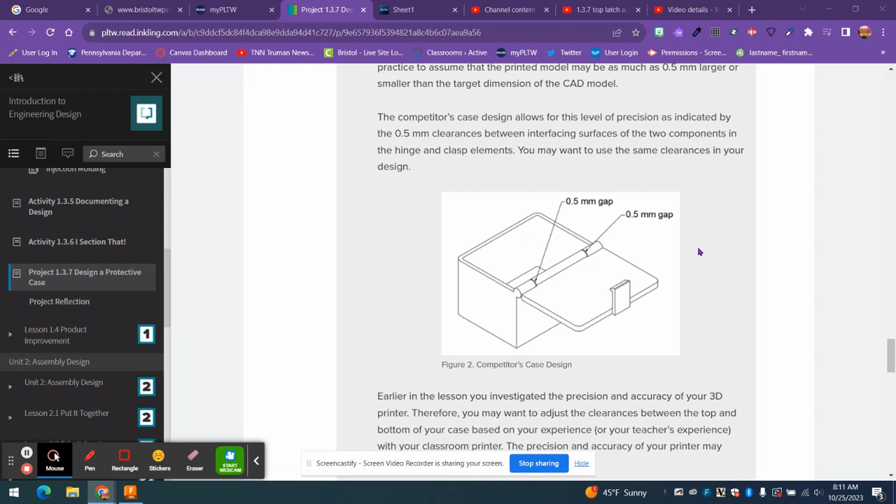All right everybody, we are going to assemble the pieces. So the biggest thing here is to remember that 0.5 millimeter gap, which has already been put into the measurements. And then we're going to go ahead and show you how to put it all together.

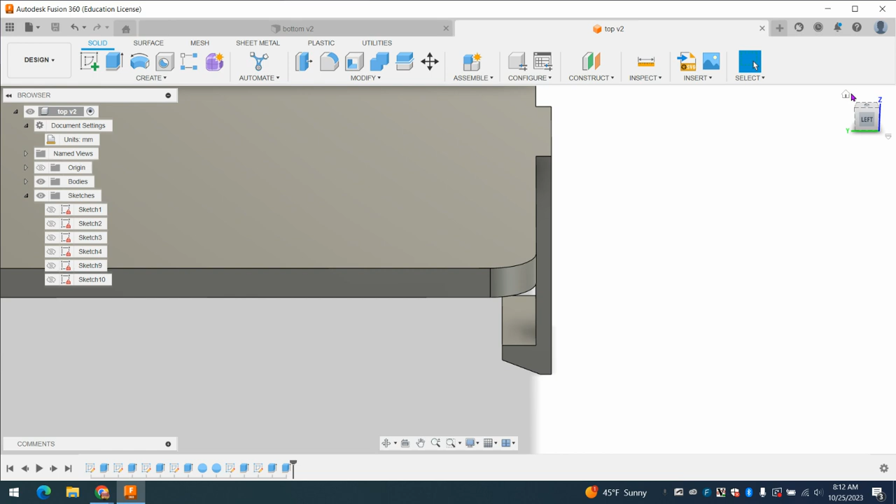So here we go. Right now I have a bottom and a top. So if I go over to my waffle, I just happen to have these in a folder so that it makes it easier for me. So when you go to your waffle, you have the two existing pieces and you're going to need that. You can do it other ways, but I like this way.

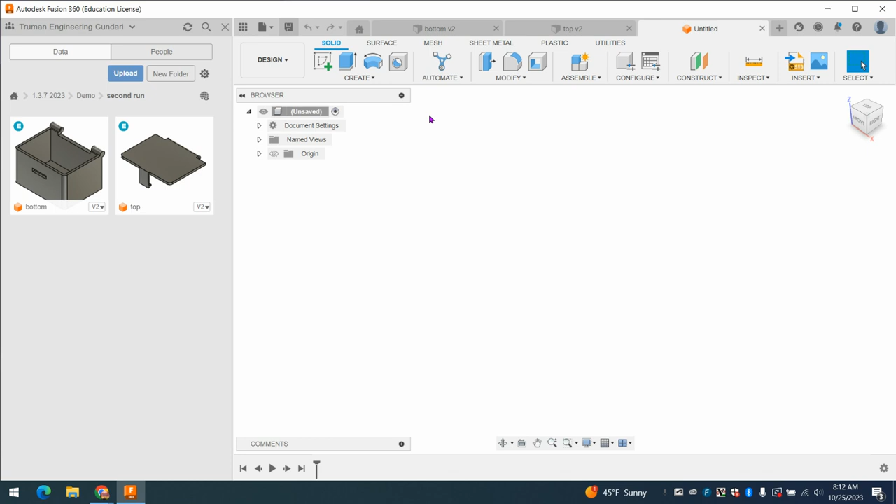Go to the plus sign here. And then the biggest thing is that you have to save it. So go here to save, and we'll call this 1.3.7 assembly.

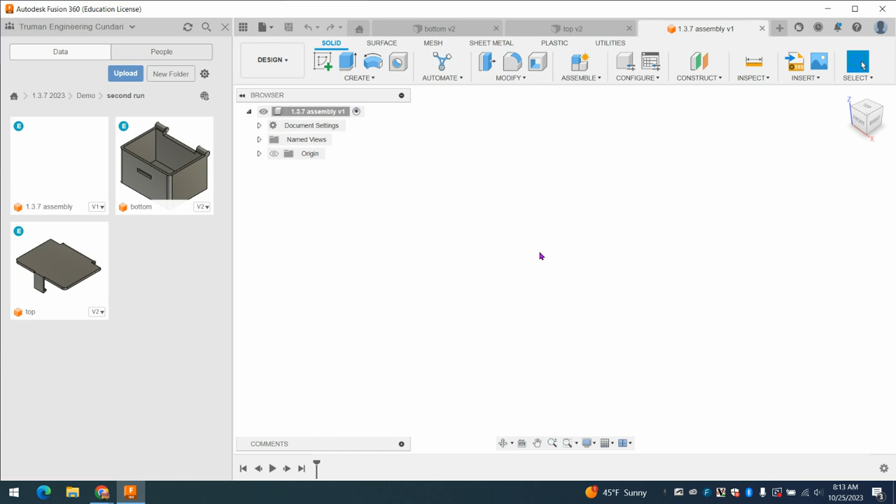So we're going to go ahead and take this bottom and pull it over - just physically pull it over. Click and pull, left button, hold down, and it brings it in. Now we're not so worried about orientation with this because it's the first one, so I'm going to hit OK.

The one thing I'm going to do is, because now you're going to have everything on your left, I'm going to right click on this and go to ground. So what I've done is I've said this is the first part, I'm sticking it to the ground. It can't move. So then as we do everything else, this is the one that doesn't change.

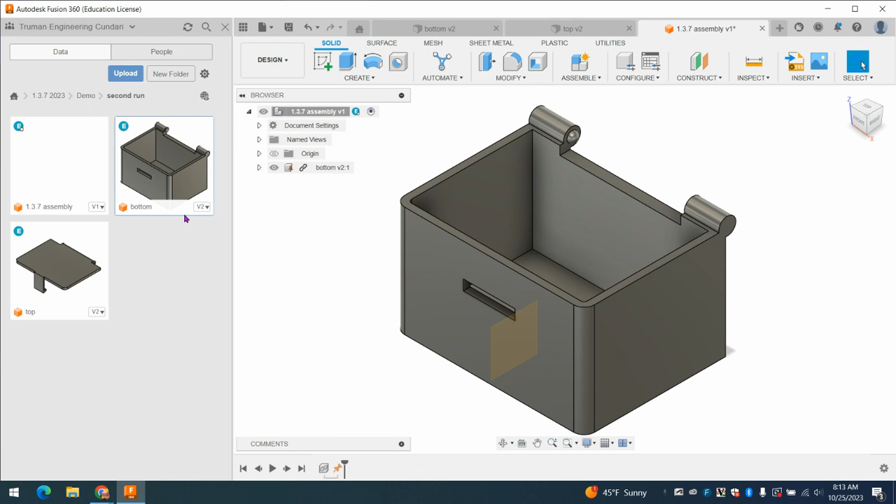And then we're going to go ahead and drag the cover in here as well, and it just kind of puts it wherever. This center dot, this is called your triad manipulator, right? So your center dot, you're just going to kind of move over here. I'm going to X this now so I have more room, and you can kind of move it above just so that you visually can see what you're doing.

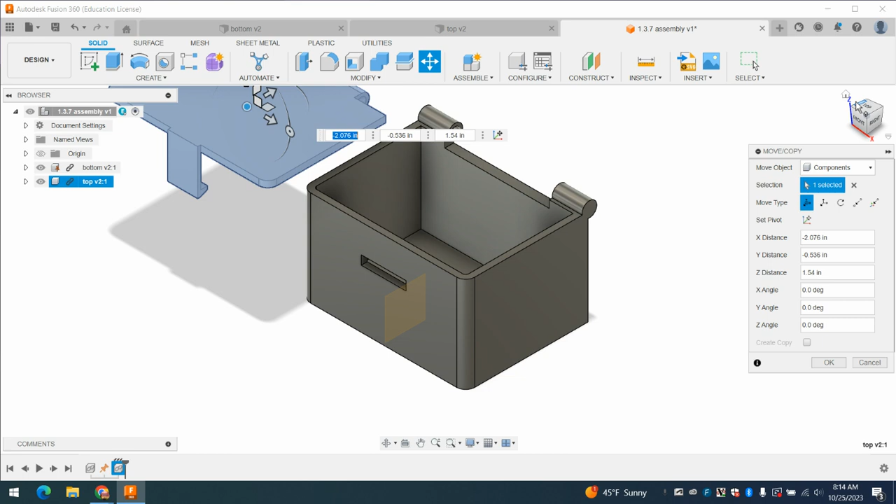This is where my rotational skills are terrible come into play. So we're going to go ahead and say okay, with it kind of floating like that so that we can see this, and we can see we're going to have to rotate it to see the other part. We're going to go to assemble, joint.

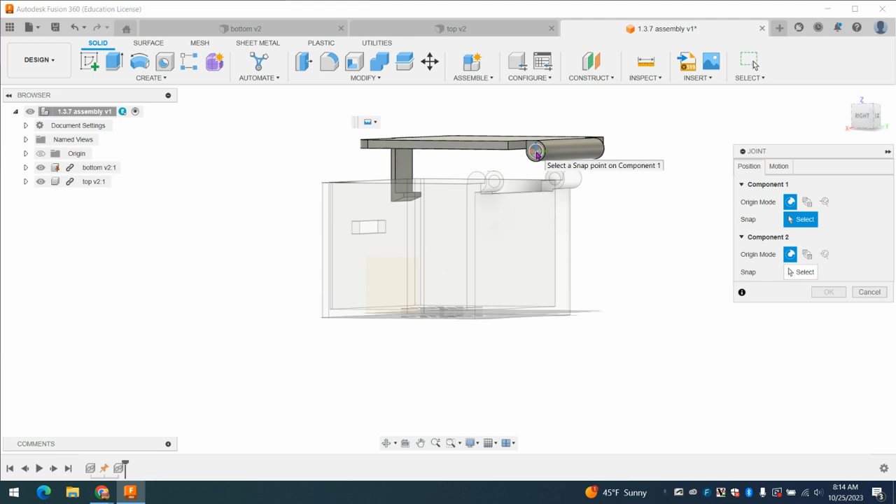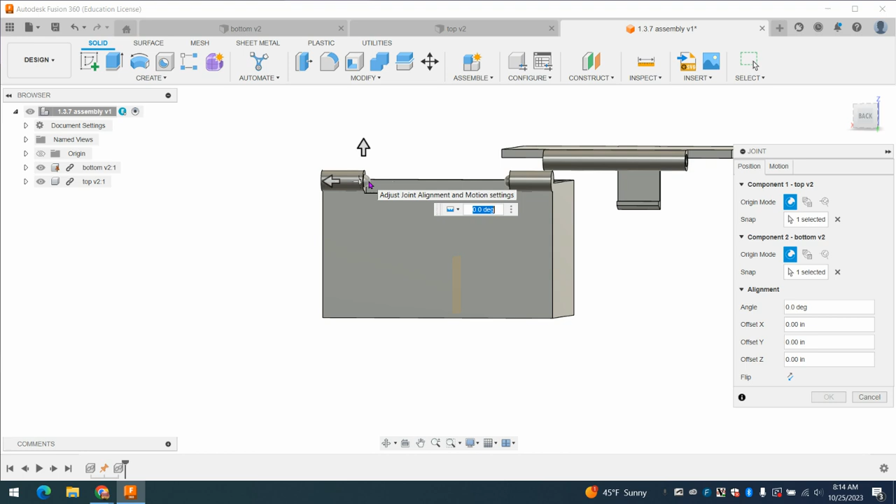We're going to select this one first and see how your blue, red, and green - there's like the little axes in there - they matter. So if for some reason you find yours is popping upside down or something like that, it's because when you go to pull this blue, red, and green, they're not lined up - see how my red would be, I want my blue to match my blue and my red to match my red. So that's pretty good, then it locks into place.

Now the other thing we see is that it locked it flat because we did it flat against flat, but we have that space there. So the space ends up being - I wrote it down somewhere. Where did I write it? Oh, 0.02. So we're going to put in 0.02 here, and it may have to be a negative.

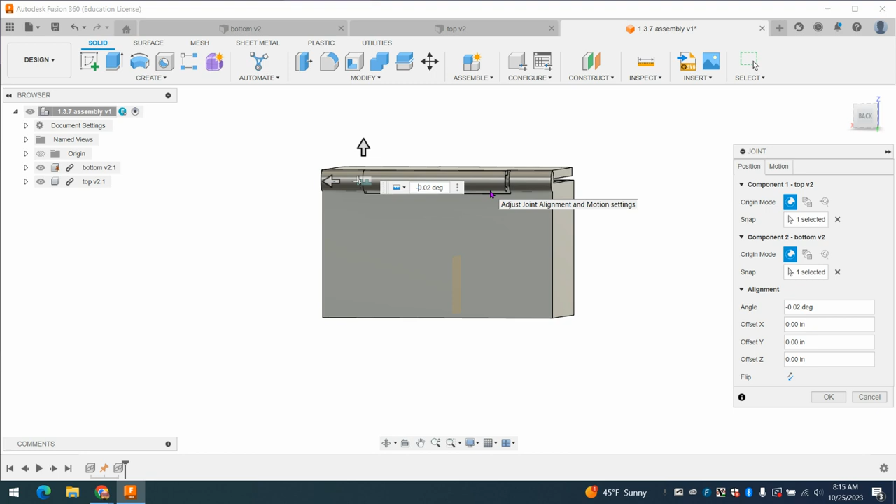Does that seem to be doing anything? No, I don't know what that's doing. Oh, that's degrees - yeah, that's not what I wanted. Okay, so let's not worry about that. So over here is what I want. It's like, why did you do that to me? Can I undo? Oh, you know what, let me just undo - oh, I went all the way. Sorry guys.

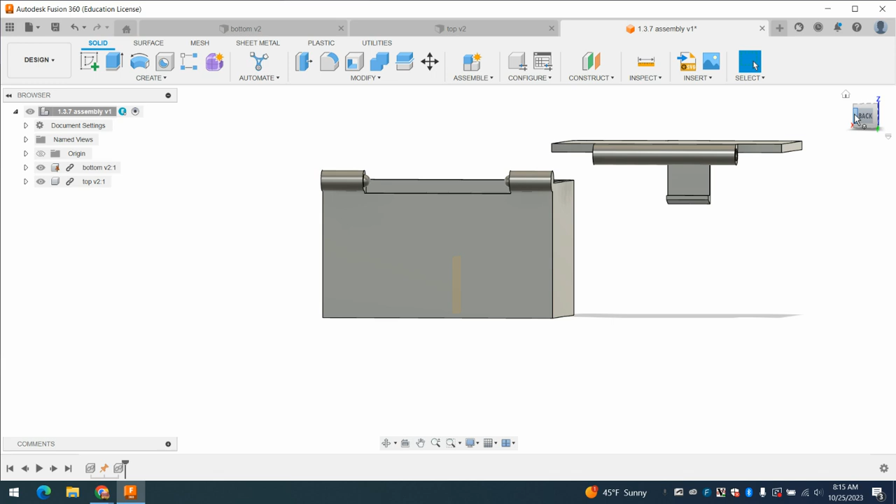Okay, we'll just do it again. So let's try that again. Assemble, joint, click on that thing. Pay attention to your red and blue - the green actually, I think, goes in different directions. But the red and blue - oh see, I did it wrong. Told you, it matters. So your red and blue matter.

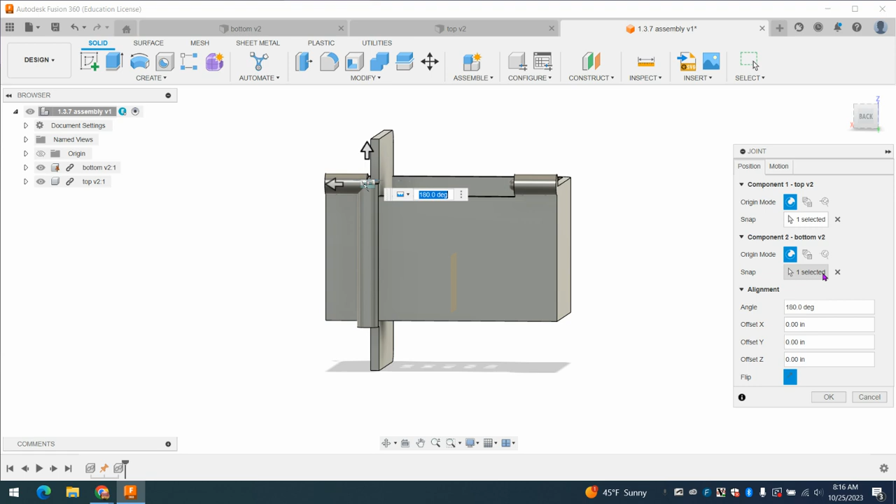No, why? Red's up, blue's to the right. Oh yeah, see that's not right. Okay, here we go - red's up, blue's to the right. Oh my God, it's upside down. It says 180 degrees - what if I make it 0? Then it's going the wrong way. Huh, well that's an interesting thought.

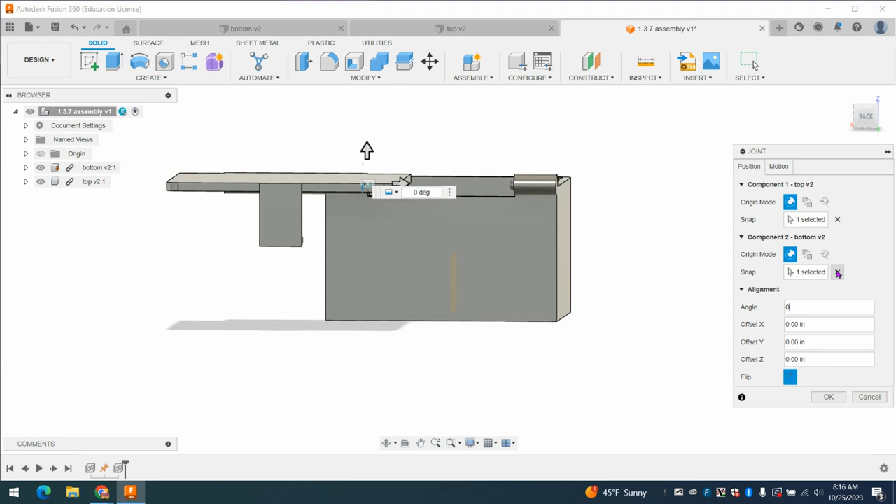I could change that, but let's try again. So I want the blue - that's what I want, the blue going opposite of the blue, and the red going up. So let's try that. There we go.

That was so crazy. And then what I want to do is take this arrow and grab it and move it. And why I'm doing that is because then I can see that's my Z axis. Sometimes, depending on how you build things, you go to move something and you're like, oh that's the X axis, but then you built it upside down or something happened - so if you move the arrow, you can always double check and make sure that you know what you're doing.

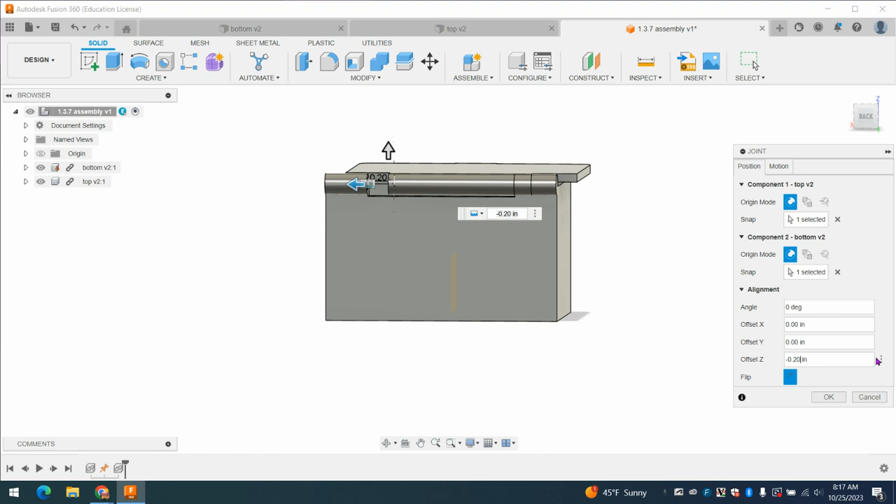And that's going to be, what did we say? -0.20. So that just throws it right in the middle. So if I click on back, see how it's exact on both sides, hit okay.

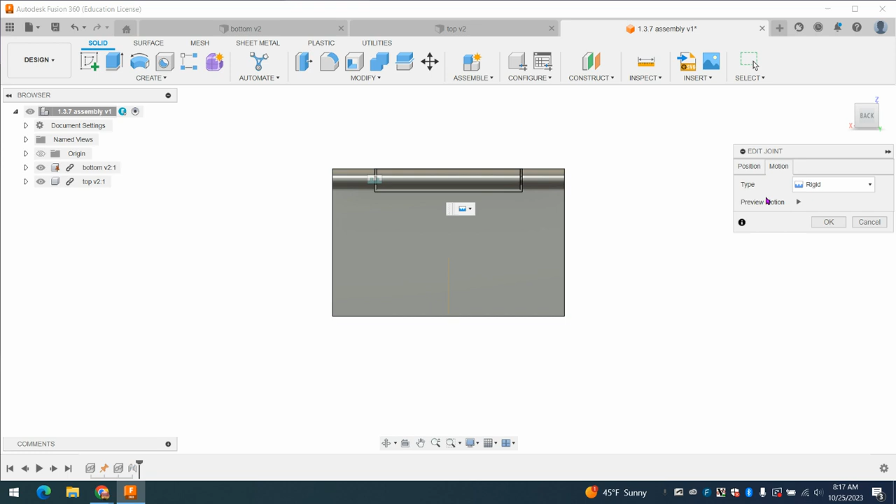And that looks good. The one problem I did with this, I'm just looking now, is that this is the wrong symbol. So I'm going to double click on my joint, and where it says motion, instead of rigid, I'm going to make it revolute.

And now there are ways to create a minimum and a maximum. I'm curious if it did. It snapped into the right place. Oh, that's kind of exciting.

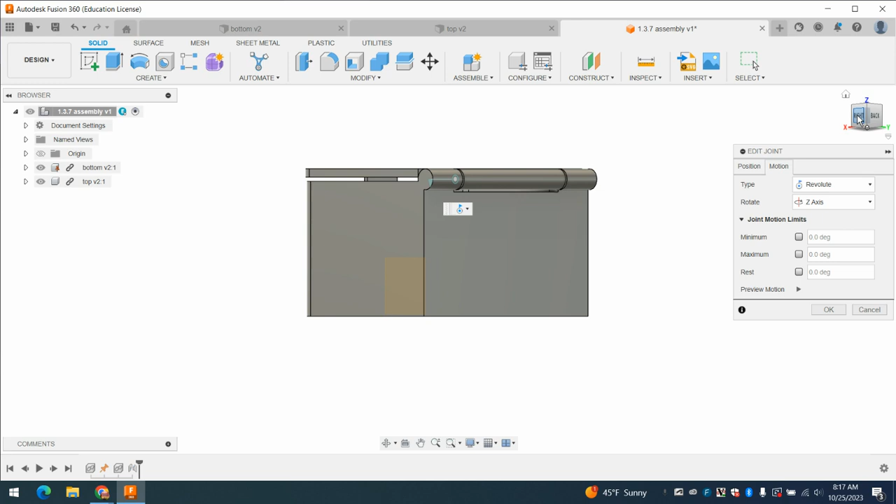The gap here, I don't like though. Just saying, if we're gonna go back and do this again someday, go sort that out. But we can actually change the minimum so that it can only go to here, and then your maximum would be this one. So it shows you it's like blue, right?

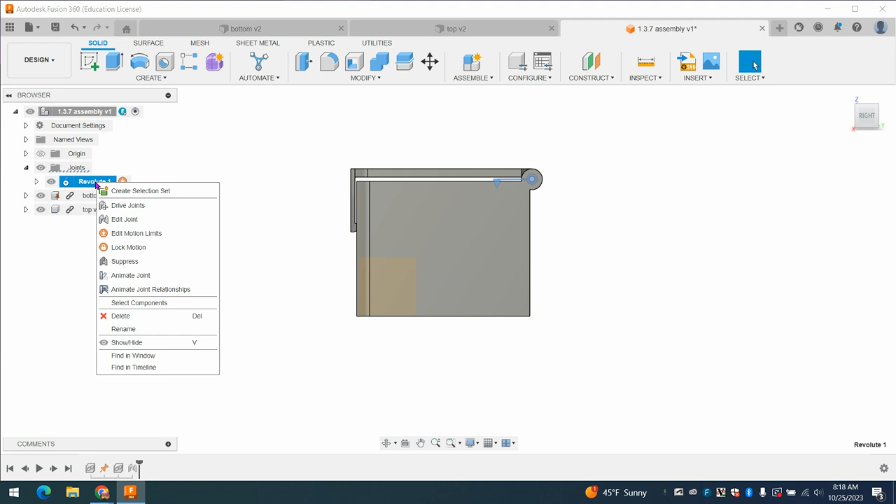So our max, let's make it go up here. Hit OK. Oh, double click on that again. Actually, I'll do it here in joints. So here I'm going to right click and hit animate, and it should just go up and down. There you go.

All right, guys, so if you've done all of this, you've officially assembled it. I'm going to hit save. I could do that all day. And hit OK so that it saved it.

But I want to show you that you can change things once something is assembled and it'll change it here. So let's show you how to do that. I'm going to go to bottom, go to modify, and go to appearance, because I'm not looking to change materials or anything right now.

Let's go to something cool. Let's do paint. Ooh, what is metal flake? All right, let's try this green metal flake here and see what we think of it. Oh, it's a download. I can download it, but I'm not going to do that right now.

That's like more - oh, they're all downloads. Look at that. Do I have anything that's actually here? Ay, caramba. All right, well, it's, you know what it is? It's because I'm using a different computer.

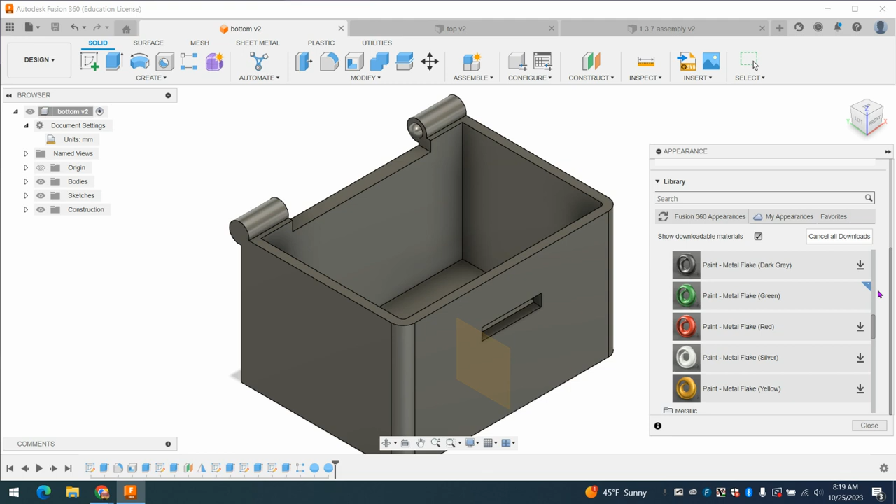All right, so we'll do the green metal flake. We'll download it. All right, let's throw this in here. Now, the one thing with this is I don't quite like the green.

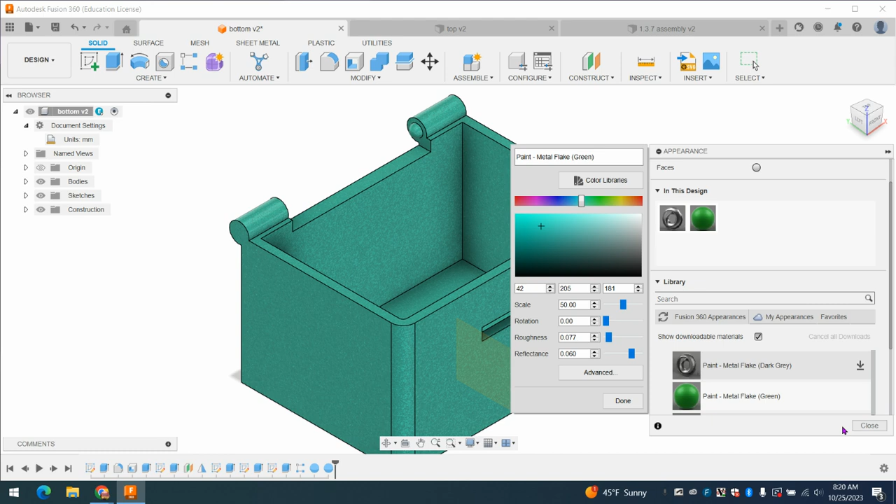So let's go back up here, double click on this, and look, you have your full range of everything. So I just wanted to show you that. So we'll go with this. Hit close. You can pick whatever color you want here, guys. This is, you know, do your thing.

So now that we have the color, we're going to go ahead and hit save. Hitting save is important, that's what throws it over to the assembly. So we're going to go here to the assembly, and I'm just going to see this exclamation point up here. Hit that, and it changes the color.

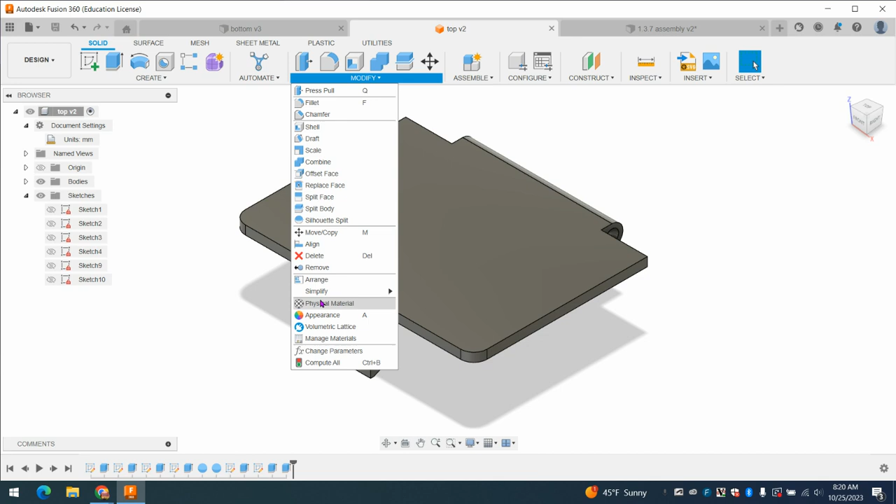So again, let's do that for the top. I'm thinking maybe something different that contrasts it, like maybe a shiny black, 3D printer.

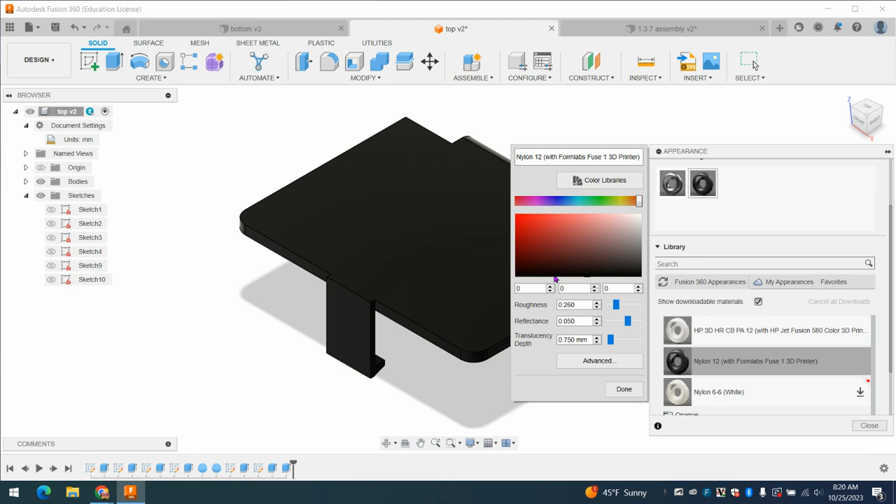I don't know, I just feel like the black against that blue color would kind of look cool. I would like it to be more glossy than that, I gotta tell you. Let's see what we got here. Let's go into paint. Dark gray. Ooh, dark gray would be pretty.

Did it do it? Yeah, I think that looks good. Okay, so then we're going to go ahead and hit save again. We're going to go here. We're going to hit this exclamation point.

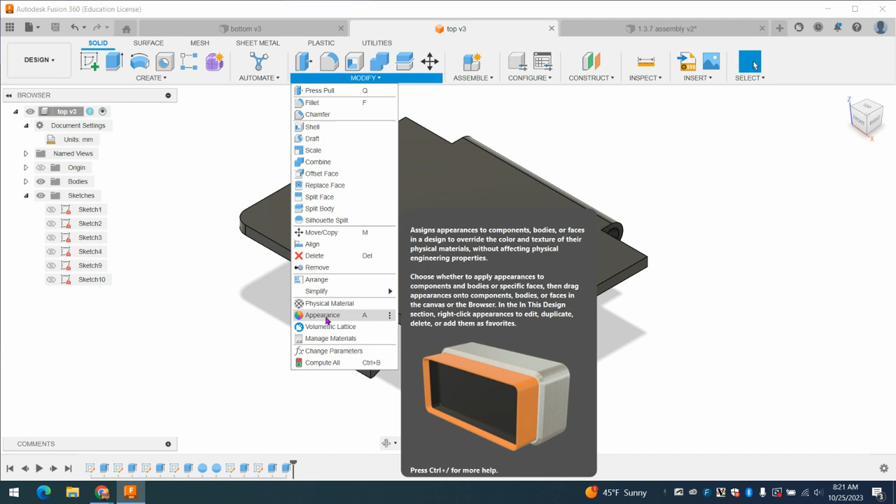Meh, I feel like it didn't change it that much. Now I'm just being crazy. You don't have to go nuts, but at this point you know what you're doing, you're just changing your colors.

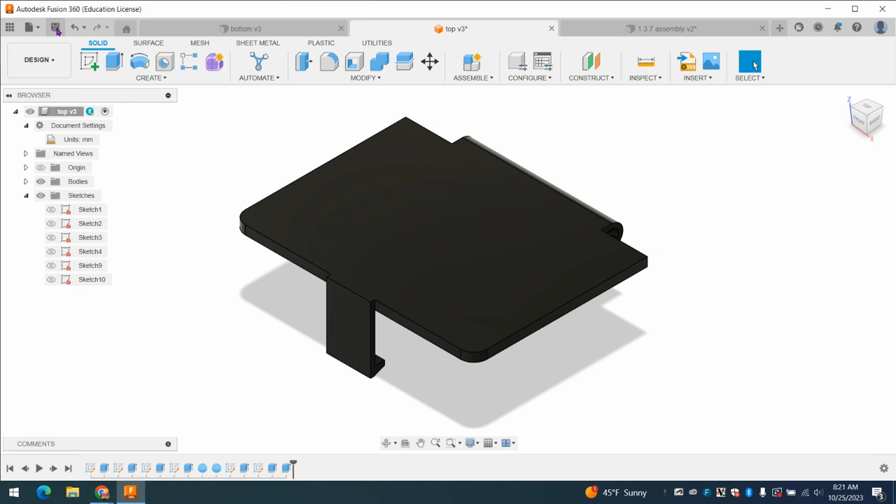Ooh, let's do like a metallic. It's not pulling - usually you're going to see a big difference in sheen, which is what I want to see. But I'm not seeing it for whatever reason, it must be my settings on my computer. All right, we'll call it a day.

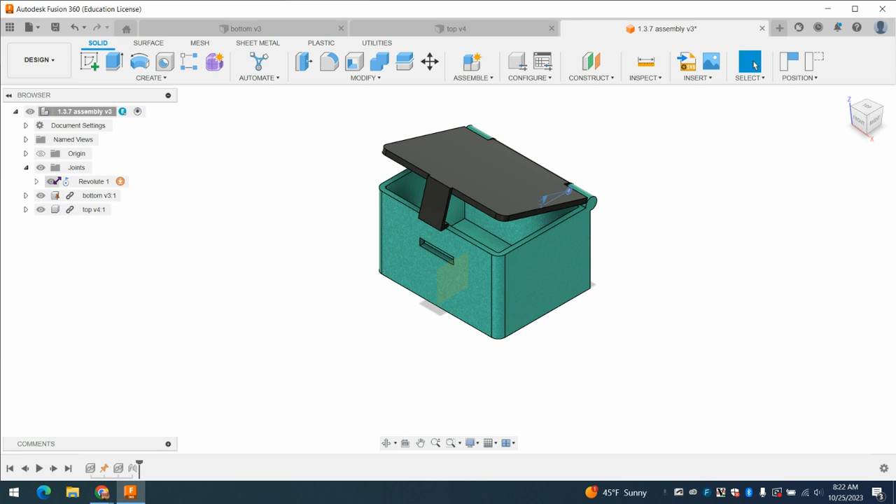Okay, so once you are done, you're going to hit save on this, and this is what you're actually turning into me as your assembly. So when I look at this, I should be able to open the lid, see how it opens up and closes. The bottom shouldn't rotate because you should have the bottom grounded. The one thing I'm going to do is just turn the eyeball off on this because it looks ugly.

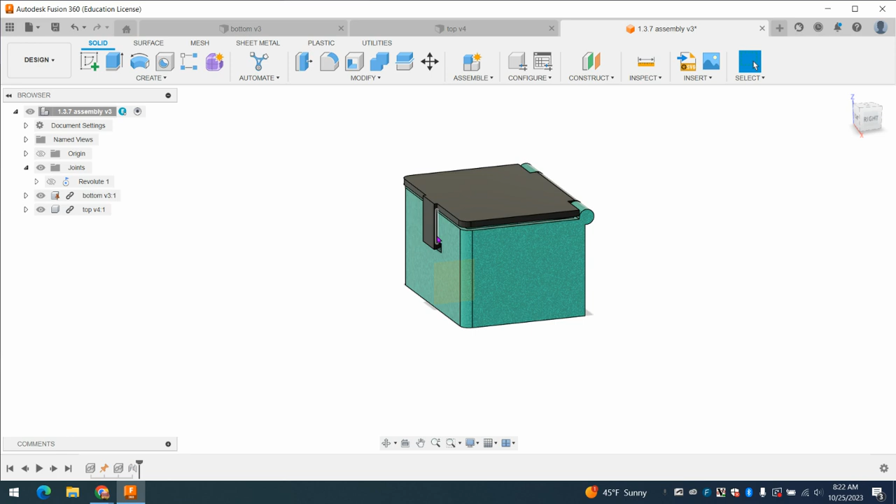There we go. But yeah, so you're going to send me the link for this. Like I said, I'm not totally happy with this - there's no way this would, I mean, it might pop into place, but it makes me nervous as far as actually 3D printing it. So anyway, this is your competitor. I don't think we should have a little cut there as it pops in. But again, this is what you're doing. Good luck, you got this.